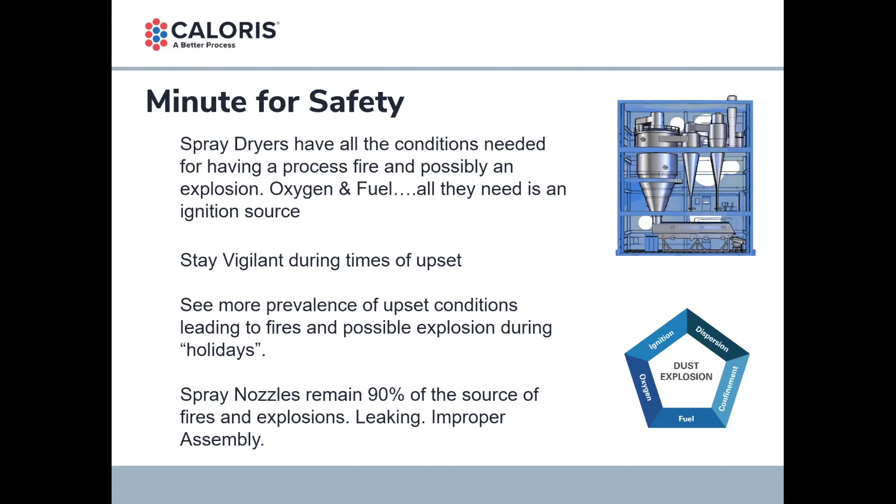Diving into the presentation itself, we're going to look for some low-hanging fruit in your spray dryer - how it could be running better, how you could have tools to troubleshoot it better.

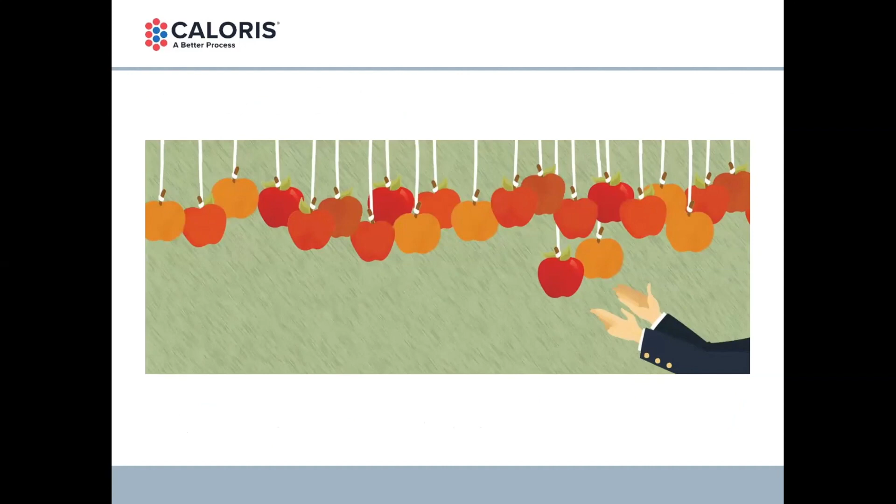I'd like more capacity out of my spray dryer, or a problem with the fluid bed. It comes back to needing some basic knowledge. And again, that comes back to spray dryer heat and mass balance. You might call it a thermodynamic balance.

To be clear about things, mass balance, I mean, that's just the weight of things. That's the weight in pounds per hour or pounds per minute of all the stuff you've got going in and all the stuff you've got coming out. So that's stuff being air, water carried in the air, your product, water carried with the product, and the like.

So we want to understand, to do this troubleshooting, we really want to understand the heat and mass balance. Whatever the problem is, unless it's a mechanical problem, the solution is usually contained in understanding the flows of things, the mass flow of things into and out of your spray dryer.

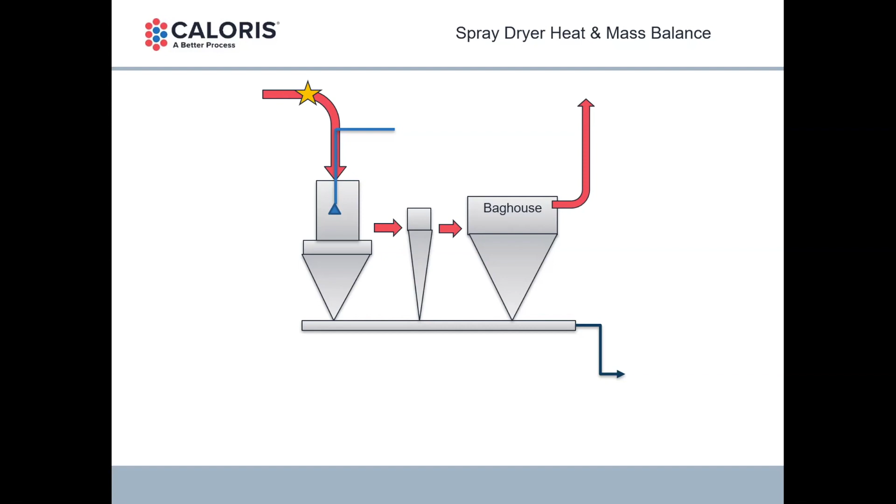So I have a little spray dryer model here. I've picked some product flow rate to come into it. That product is at an amount of solid, so I've picked 50%. So it's half product, half water, and it comes in at a temperature. For our little model of spray dryer here, we're going to get some product out based on the amount we've put in.

In the perfect world that this spray dryer lives in, we're not losing product inside of the dryer. It's not hanging up, it's all coming out. But some of the water stays with it because you've got a moisture. In this case, I've said 5% moisture in the finished product. So we've got a little bit of water coming out with the product bound up in it, and it comes out at a temperature. We've got an airflow coming in.

That air consists of the outside air, so the oxygen and the nitrogen and the argon and whatever else makes up air, plus some water vapor from humidity that comes in with it. Because we're trying to follow the water in this dryer, we need to follow the humidity, the vapor that's in our air portion. And finally, we're going to get the air out.

Now my air out, balanced in this mass balance, comes out at a temperature. It consists of the air that went in, the vapor that went in with the air, the amount of water that got evaporated, all added up to be a new mass, a new weight of air leaving at a particular temperature. Now remember, we're talking about pounds.

When we're talking about air, and that's sometimes strange to people, air is often talked about in CFM, cubic feet per minute. That is a volume flow. And although interesting and able to be converted to a mass flow using the density of the air at a temperature, at an altitude, we do want to evaporate a mass of water in the spray dryer, so we're definitely focused on a mass of air, a weight of air in pounds per hour to evaporate that weight of water in pounds per hour. So I do have a star up here on my diagram.

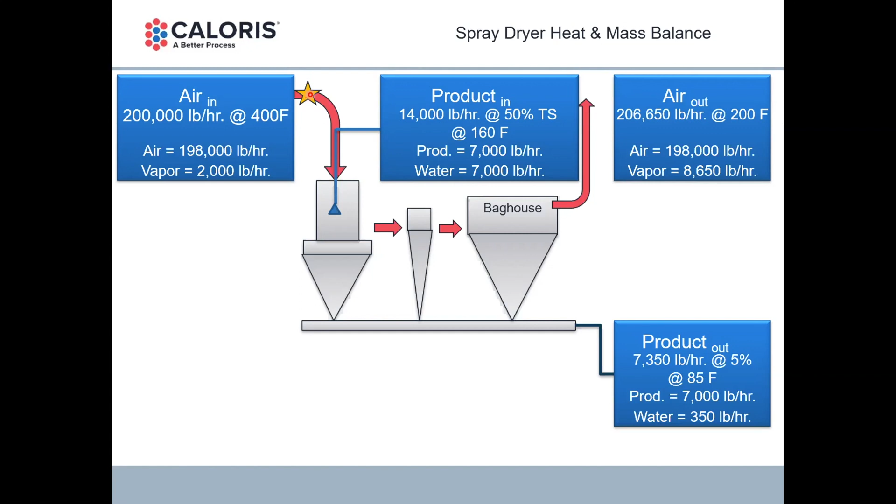There's one caveat, or one could find many caveats, especially if there's additional air streams from fluid beds and the rest. I do want to make note of one thing, and that is how you're heating your dryer, how you're heating this 400-degree air. A lot of cases around the world, and some in the US, we're using indirect heat. So maybe it's steam through a steam coil, or an indirect natural gas heater that doesn't add in any water. But here in the US, we have a lot of direct fired natural gas heaters.

So we might be heating the air up to 400 degrees using direct fired natural gas. And that adds water. Remembering natural gas is methane, so CH4, we're going to burn that in an excess of O2. And the other side of that equation is CO2 plus H2O. In our size here, in about 200,000 pounds of air, and we're going to heat that up to 400 degrees, you may be adding as much as 1,000 pounds per hour of water to your air by burning the natural gas.

And that needs to be accounted for because we're trying to follow all the things that go through this dryer. Just a little note there. We're going to assume that our dryer going forward is indirect heat, so we'll forget that there's water being added through a direct fired gas heater.

So there we are. But what we have defined in this heat and mass balance, or thermodynamic balance, is 16 things. We have 4 blocks, 2 things in each block, and 2 parameters in each of those 2 things, a weight and a temperature. So we know 4 things, what are coming in with the air.

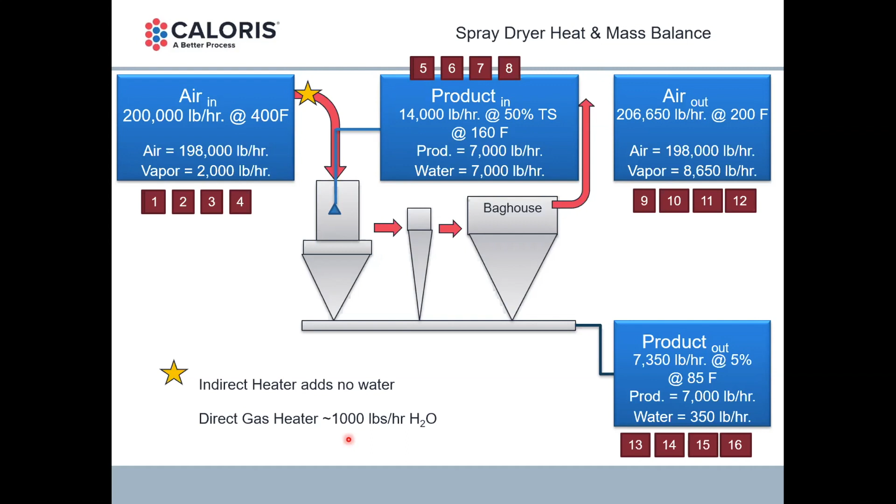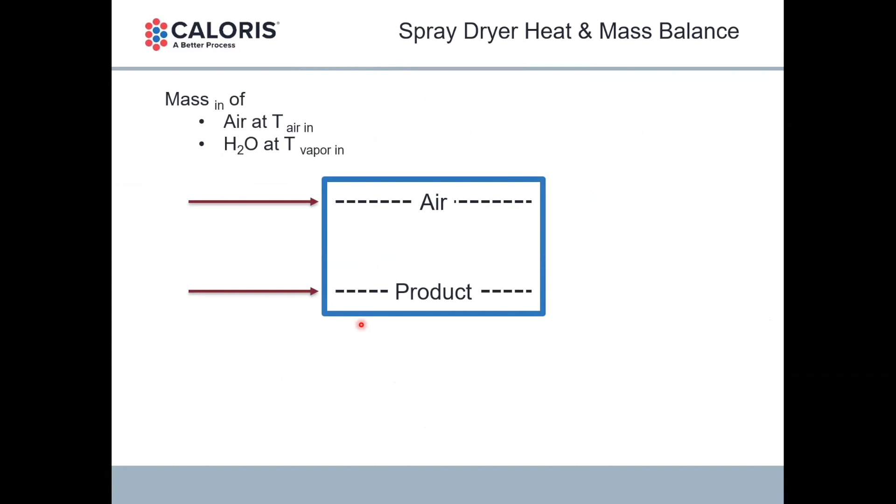We're going to bring the mass in, so the weight in pounds per hour of the air and the vapor at a particular temperature. We're going to do the same with the product. This is the spray nozzles now shown bringing product in with some water mixed in with it at a particular temperature. We're going to transfer some of that mass. Some of the water is going to evaporate out of the product and into the air. So we've got a bit of a mass transfer going on. That's what we need the formulas to help us figure out.

We've got an energy transfer. That's a little harder, that's where the temperatures come in. We've got to figure out how much energy goes from the air to the product. And all of that gives us a mass of air out at a particular new temperature and a mass of the product out at a particular new temperature.

So if you can grasp these same 16 things, we showed 16 things in the last drawing, we get 16 things in this drawing. It's just a different way, a little more schematic way of saying the same thing. But 16 things, if you're missing one, we've either got to measure it or calculate it.

So when you call me or someone like me out to your dryer, again, all that troubleshooting, my problem with the bag house, or I've got a problem with needing more capacity. We're not running as much capacity as we used to a few years ago. If we're trying to troubleshoot those sorts of problems, it comes back to the mass balance, and we've got to know these 16 things somehow.

Or again, if you have a fluid bed, some additional things going on with your dryer, different air streams and the like, we need to know a few more things. But our simple model here, 16 things.

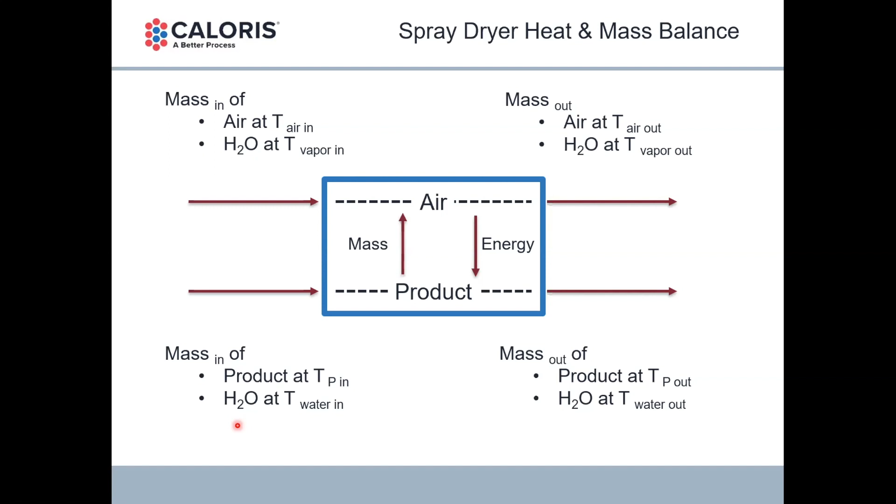So it's kind of concluding the theoretical side of this. We need 16 parameters, and the salient part is we need them accurately. If you want to know accurately how much more you can produce without clogging up your dryer and wetting down the walls, getting the most out of it and into a bag so you can sell it, we've got to know these things accurately. So the 8 temperatures are fairly easy. RTDs, the temperature measurements, the probes on your dryer, if you've got them there, are fairly easy and they're accurate.

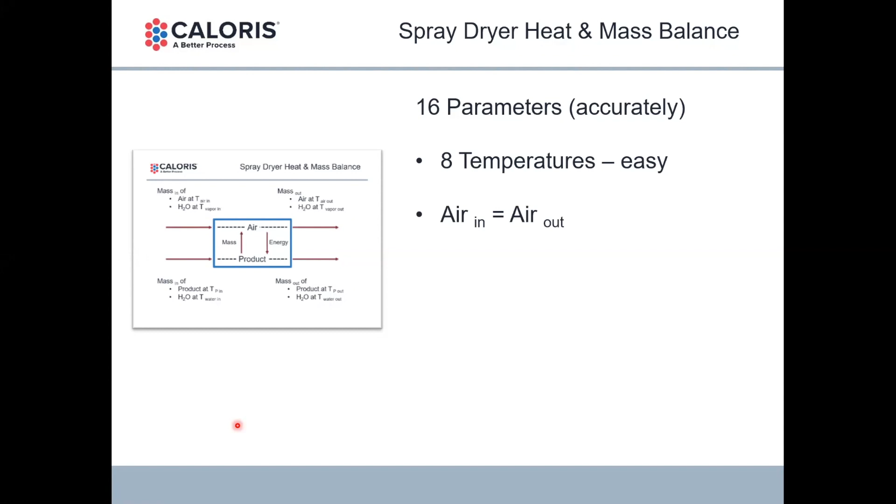So the first half is done. We've got a few simplifying formulas we've already mentioned. The amount of air you put in, the oxygen, nitrogen, argon, whatever air parts you put in, you're going to get out. We assume the dryer is leak-free, not losing a significant amount of air out a hole in it. What goes in comes out.

And we're going to say the same about the solids. If we're spraying in an amount of solids in your liquid feed mixed in with the water, we're going to presume it's all going to come out. If you want to sharpen up your model, you could say you'll lose some to wall buildup, or lose some out of your bag house. But in our simple model, we're going to say whatever we put in is going to come out again.

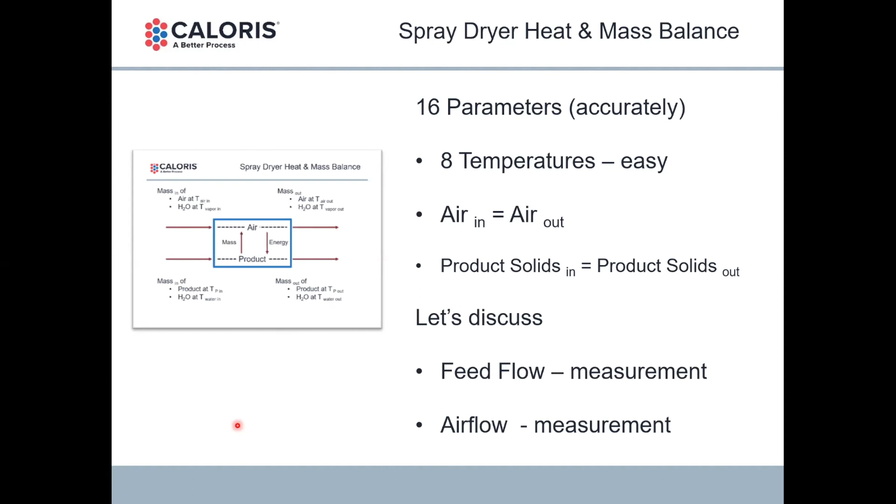But now we've got the harder ones left to figure out, and that's what we're going to spend the rest of the time discussing. We want to talk about the feed flow - what you're spraying in as liquid, how to measure that accurately, and about the airflow, how to approximate it and measure it accurately. That's going to be the second half of what we've got going on here today.

So a little bit of how to apply this to troubleshooting, a little bit about improvements you can make, and a few simple tricks that people have taught me over the years that I want to pass on to you.

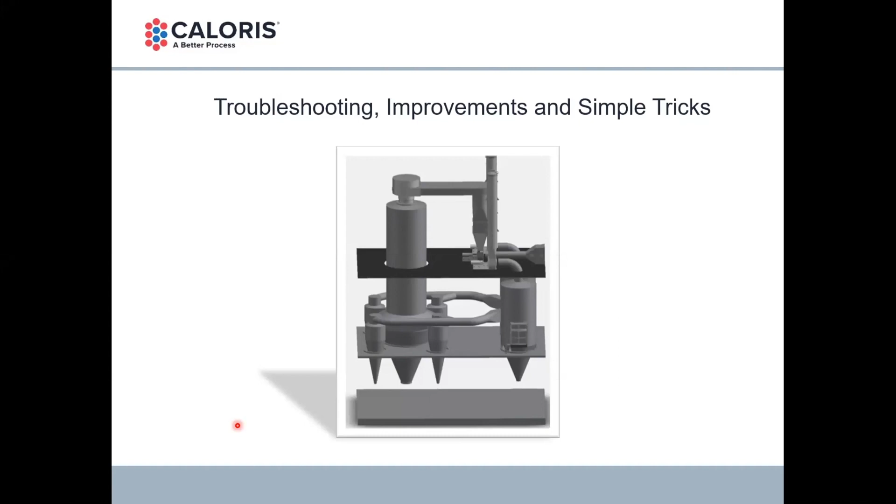So the first part, we're going to talk about feed solids going in - that's our product going in. Are you running consistently? Are you feeding consistently? Are you making your feed consistently? And if you make it consistently, can you measure what you're making accurately? So that's the first part of the discussion.

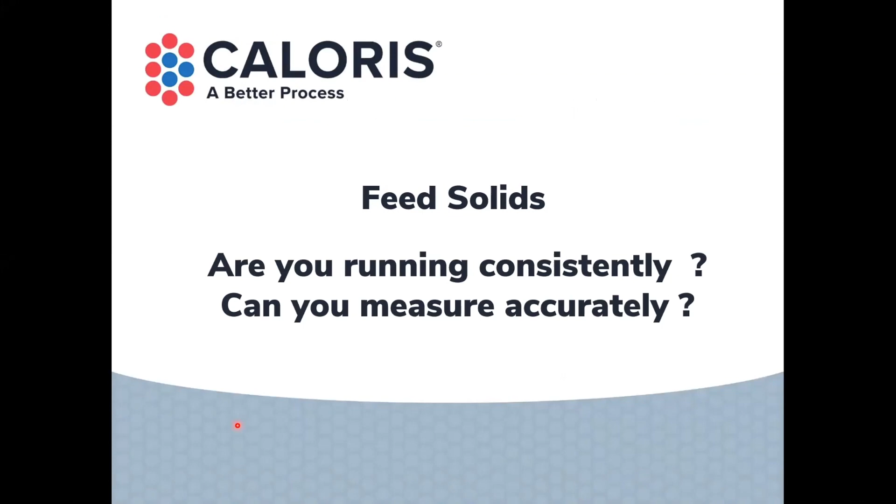Now, I'll come into a plant sometimes and I'll ask the operators, so what do you think you're spray drying? What do we go into the control room - what are you drying today? And the operator will tell me about what they get from upstream in the plant. They'll say something like, I usually get 26 to 28% total solids of my feed in the feed tank. So 26 to 28% of the mass of things you're trying to capture, and the rest of it being the water or whatever you're trying to evaporate.

Well, how often do you measure it? Well, we measure it once an hour, record it, put it on our log sheet. Now maybe you have a more modern HMI system and a data logging system, way better. But still often the operators only know what's going on right now or what went on an hour ago. But how does this impact things? How accurate is this, and how does it impact what's going on?

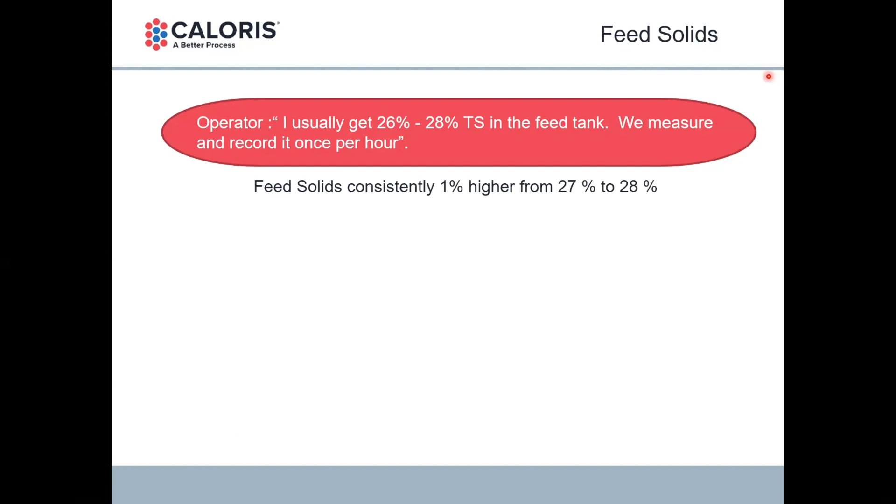To troubleshoot it, you've got to know accurately what's going on. So I want to talk for a minute about what consistent feed solids really means. What would 1% higher actually mean? Not yet measuring more accurately - let's say you're measuring accurately, your instruments are calibrated, you've got instruments with good resolution, but you actually want to get 1% more. Instead of them feeding you 27% from upstream, they're going to feed you 28% from upstream.

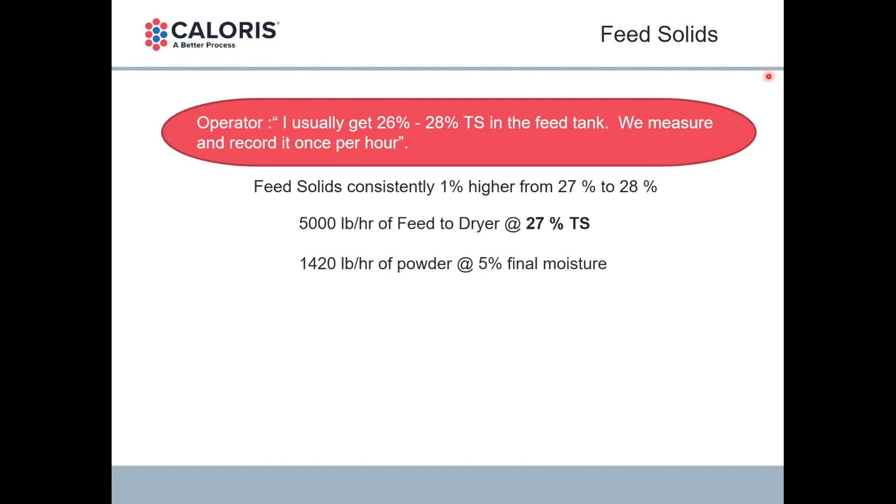What does that mean? So I'm following an example now of a 5,000 pound per hour dryer. So 5,000 pounds per hour feed, liquid feed, coming to the dryer, 27% solids. That's going to give you 1,420 pounds per hour of powder coming out, still with 5% final moisture. So a little bit of that is water bound up in the powder, and that gives you 3,580 pounds per hour of water evaporation.

But now we want to get the guys upstream to feed us 1% higher solids. What does that mean? I'm going to use the same amount of water evaporation - we're not changing temperatures, we're not changing airflows within the spray dryer, we're just going to thicken up the feed solids just a tiny little bit. And now we're going to feed in 5,080 pounds per hour of feed to the dryer, 28% solids, and we're going to get 1,495 pounds per hour of powder out. So, okay, 75 pounds per hour more out.

But that's really a 5.2% increase in your production rate, from 1% more in the solids. This is what I'd like you to leave with, understanding this: 1% more in the solids is going to give you a 5% increase in your powder output. What would you do for that? What does that mean to your operation? Are you measuring accurately enough to do this? Are you operating consistently enough so that you could take advantage of this?

And what would you do to get yourself consistent enough or measure it accurately enough? Well, that's 75 pounds an hour. I'm going to take a low number and say 5,000 hours a year. If you're running more than that, it would be natural for a plant, especially a dairy plant or commodities plant, to be running 7,000 hours a year, but I'm going to say 5.

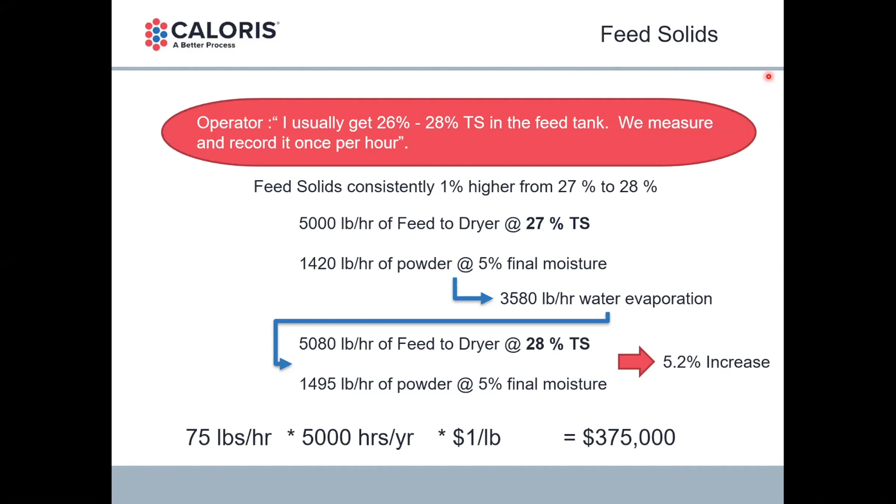So feed solids, we'll move on to feed rate. A couple of tricks here about feed rate, because we not only need to know what we're putting in, we need to know how we're putting it in, how fast we're putting it in, the pounds per hour that we're putting it in at. And if you have a feed flow meter, that's great.

And if you keep it calibrated, that's fantastic. But calibration is a challenge. Keeping it calibrated is a challenge. And a micro motion type Coriolis meter is an expensive item, and not all plants have them. So what else could you do?

Or if you need to make a comparative measurement, you, the engineer, need to go in and find another way to see, is the flow meter really accurate? Well, your nozzles, your spray nozzles are an orifice flow meter, and I want to show you how to use that. Your positive displacement pump.

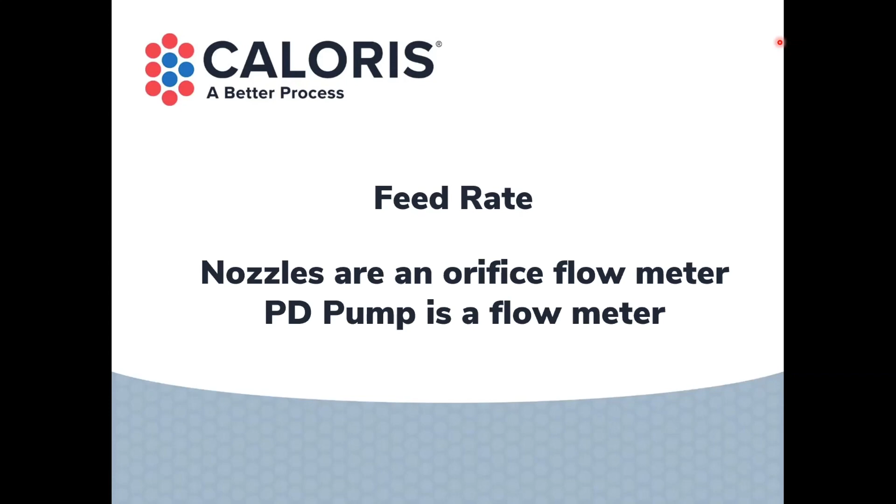So if you're using a high pressure pump, that's a positive displacement pump. And so if you're using that, that's a flow meter as well. So let's take a look at those two. So high pressure pump is a flow meter.

We know your high pressure pump will have a number of plungers in it. It might be 3 plungers, 5 plungers, whatever. That's a cylinder, and we can know its size. So it has a plunger diameter and a stroke length, so you can calculate each of the 5 piston sizes, the piston displacement.

If you don't know it and you have your operation and maintenance manual, it can probably tell you there, or you can go back and call your manufacturer and find out what that piston displacement is. If you know the maximum speed, which will also be in your operation and maintenance manual, you'll know what your total maximum is. This particular example, 120 RPM maximum.

So if we calculated out what this pump displaces and what it is as a flow meter, we would first recognize, okay, it's a liquid, so it's an incompressible fluid. We have a cylinder volume. In this case, that above calculates out to 497,000 cubic millimeters, so I'm going to say half a liter with every cylinder stroke.

We've got 5 cylinders running at 120 RPMs. So that gives me 300 liters per minute.

And the loose number that's in there, the approximation, because everything else is pretty tight so far, the approximation is the transmission efficiency. So I'm going to say this thing runs on a belt drive. The belts have a little bit of slippage. There might be a tiny little bit in the transmission itself. And I've found historically when I do this, 97% transmission efficiency is pretty good.

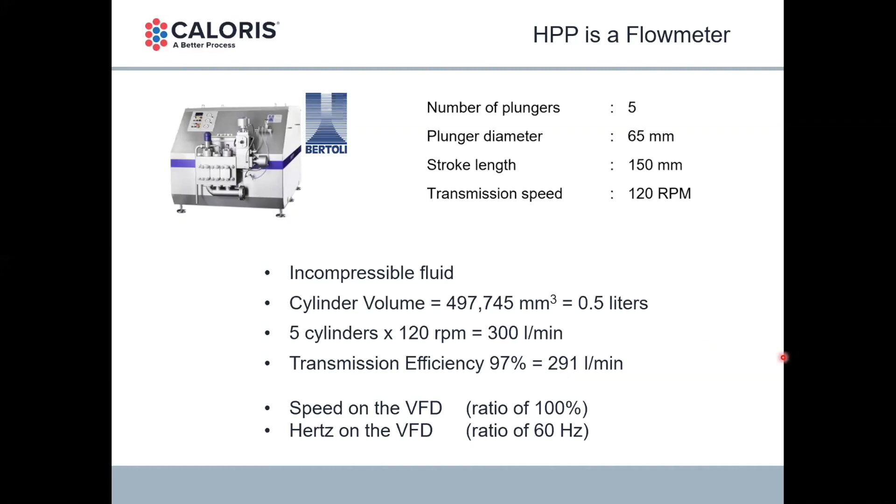So your nozzles are also an orifice meter. There's lots of brands of nozzles out there. Delavan is very popular, Spraying Systems is very popular. They're both reputable manufacturers, no issue there.

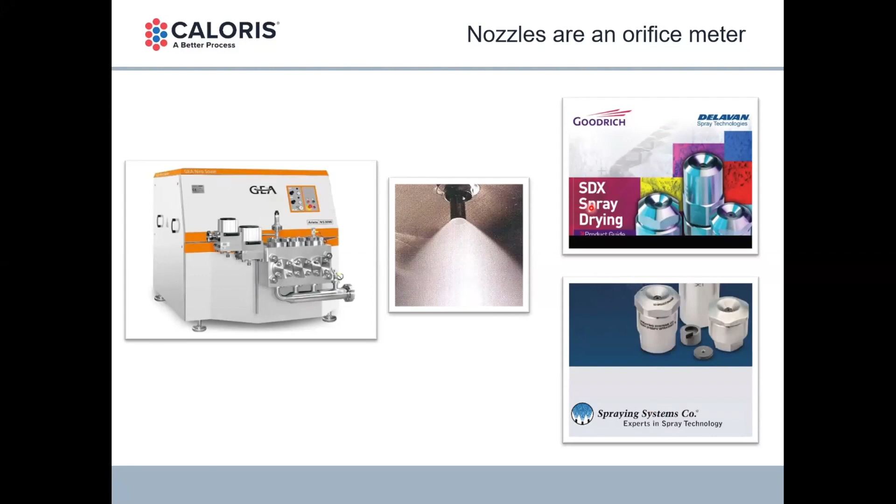So do make sure, as you follow this exercise, I challenge you to do it yourselves for your plant. Do download your data sheets from your manufacturer. I'm going to follow this exercise through as if it was Delavan nozzles. Delavan has a PDF you can download.

You'll need to know the type of nozzles. I followed this exercise through for their SDX nozzles. I'm going to say that this dryer we're talking about theoretically is using SDX V nozzles, so I'm in the column for SDX V. You may have different ones.

A nozzle consists of two parts, the swirl chamber and the orifice. So you've got to see what swirl chamber you have. I'm going to say I have SFV swirl chambers, and my theoretical dryer has 109 orifices, so that's 0.109 inches in diameter.

Every day your plant puts together their nozzles, presuming you have nozzles and not a rotary atomizer. Every day your team puts them together, and you're buying more replacement parts. You should really know what your nozzles are. It's probably hung up on a piece of paper or in a book in the control room.

But knowing what those are allows you to use the catalog from the manufacturer and find out the flow rates, because they're all calibrated. So if I follow the 109 across the chart, I'll pass by the liters per hour, and go to the gallons per hour size. Now we want to know the pressure, and that's going to be on the high pressure pump or a readout from it. I like to use the gauges on the high pressure pump itself to get the number.

If the number is somewhere in between two values, you can ratio it linearly and get an average, finding where in between two values you should be lying. Here, for this simplified example, I'm going to say we're running at 3,000 PSI, and that means each nozzle would be 343 gallons per hour.

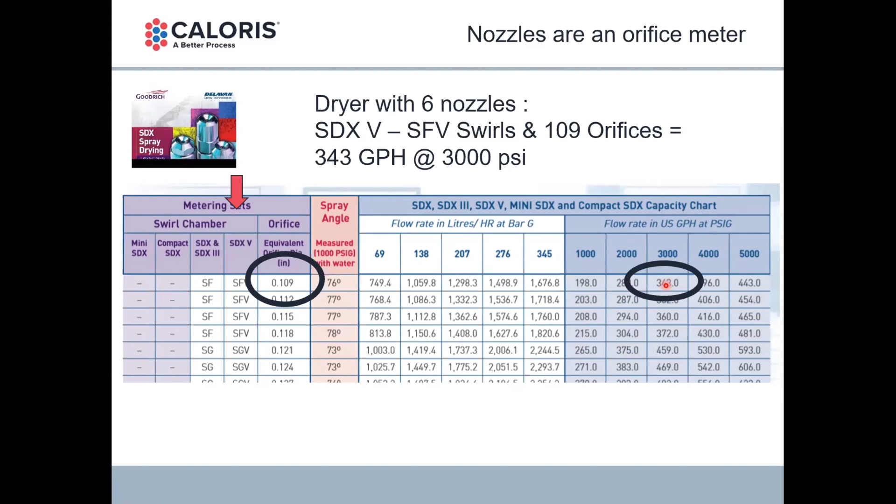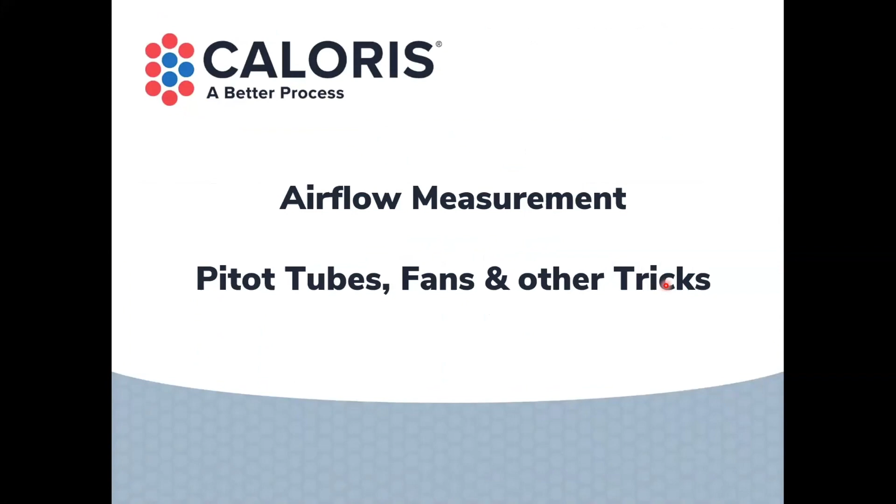So that takes us through the feed side, feed flow and feed solids. I want to go into the airflow side. We said we'd talk about airflow, needing to know airflow as part of your troubleshooting. So we're going to talk a little bit about pitot tubes, talk a little bit about fans, and a couple of other tricks to approximate, to get that wet finger feel for what your dryer is potentially doing.

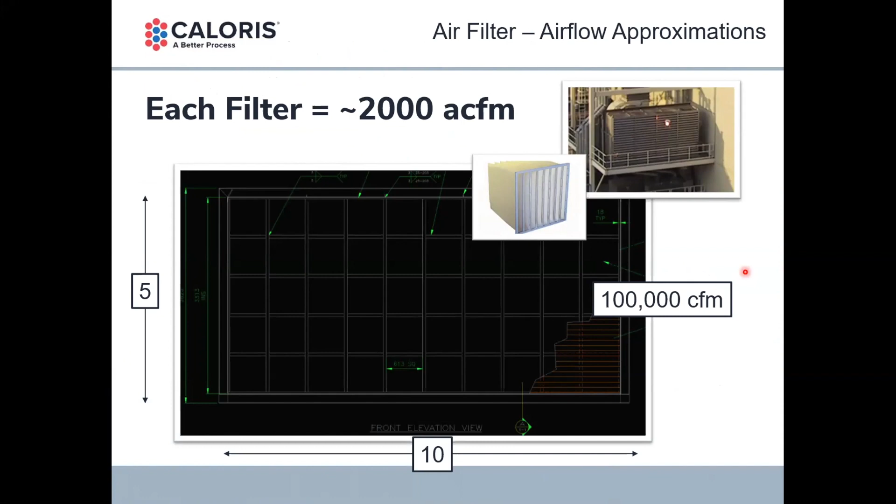All right, air filters. This is an approximation, a wet finger sort of thing. You walk into a plant, you're just trying to get a common sense approximation. You calculated how much air was, or somebody told you how much the airflow was. Are they even close? Is this the right number?

One of the rules of thumb is for proper design of an air filtration system, each filter cell, and the filter cells are generally 24 inches by 24 inches, or in metric, 600 millimeters by 600 millimeters. Each air filter is generally designed for about 2,000 ACFM. So that's the rule of thumb. I've thrown a drawing of a filter box up here, and this filter box is 5 filter cells tall by 10 filter cells wide.

So when I look at this dryer, when you call me out to your spray dryer and say, Jim, help me with my dryer, I'm going to go look at the various filter boxes you have around there, and I'm going to say, all right, this is about a 100,000 CFM dryer. Now, again, we're in volumetric flow, CFM. I need to find the altitude of your plant, the temperature of the air, and then I'll get a volume, a mass flow, and convert that into pounds per minute and pounds per hour. But it gives me a very wet finger approximation.

Now, that's if the dryer designer designed this well, if it's still running the way it was designed, and there's always a little bit extra. They probably didn't need 50 filters, they might have only needed 47, but 50 makes a nice square, 5 by 10, so it probably has a little bit more in it. But still, it gives you that basic fundamental approximation to know how much air is moving through this system.

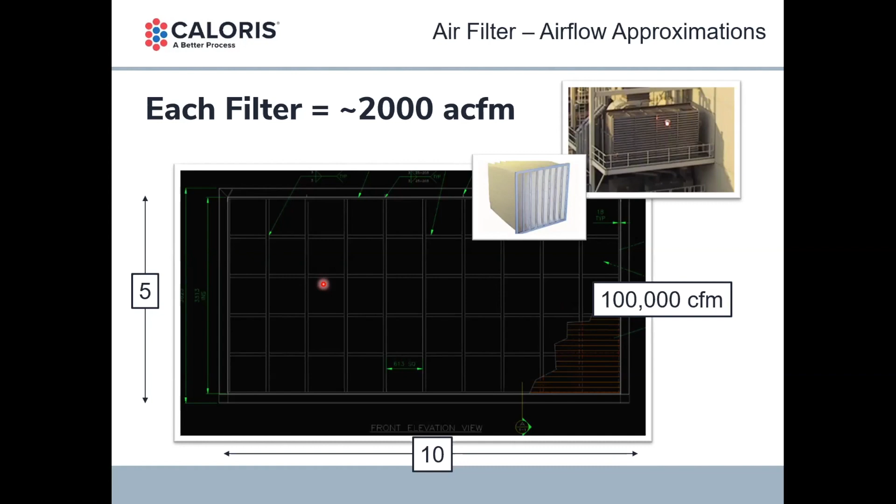So airflow approximation, step one. We want to get a little closer, we want to measure it more accurately, so we're going to do it by pitot tube. Just because we're maybe a little bit more used to seeing pitot tubes in our life than we realize, pitot tubes are a device used to measure airflow. For your next pub quiz, you can have this fact.

Henri Pitot invented this in 1732, and he was using it to measure water flows on the Seine River. It's subsequently been realized it can be used to measure airflows, and it's on the outside, multiple places on the outside of every airplane, measuring external flow. We can use a device like shown here on the left to measure internal flow inside of a duct. We're going to measure the total pressure on one leg of this, the static pressure on the other leg of it, and we're going to use those two to get a dynamic pressure differential, or commonly the pitot pressure.

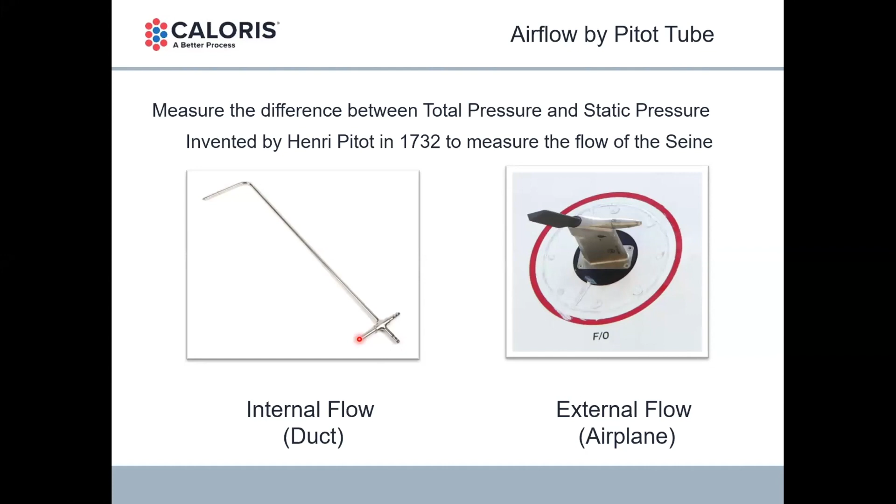You're only going to get a highly accurate measurement if you have fully developed airflow, so it's not faster on one side and slower on the other. Well, we never live in a perfect world. Our dryer ducts are never as long as we'd like them to be.

So we've got to do some work, we've got to do pitot traverses. If you have a round duct, you want to go across the duct, up and down the duct, get some averages across these, do concentric areas, again, equal concentric areas. The inner area is the same as the area of the outer annulus, and you've got to plan these measurements so you can get an average, an accurate average.

You're going to measure a differential pressure, and you'll know your air density for your altitude and temperature. You'll divide that, or use the gravity constant, and get a velocity through a square root factor, so you can get the velocity in the duct. From that, you know the cross-sectional area of the duct, and therefore you get a flow through that duct. A bit of a complicated procedure, but still the best way to get an accurate airflow measurement through the duct. A small amount of equipment, a little bit of work and knowledge, and you're going to get a good reading.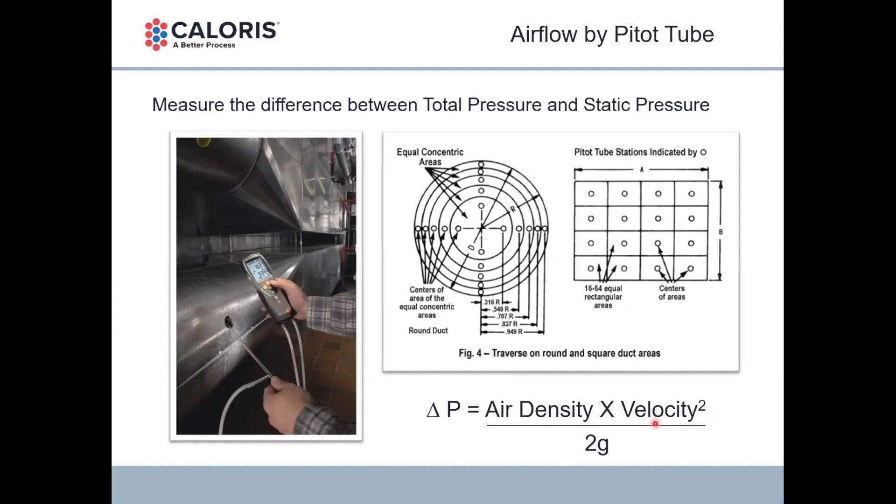So a couple of caveats about pitot tube measurements. If you have too low a velocity in the duct, say 20 or 30 feet per minute, you're not going to get enough of a differential pressure. It's going to be too low and imprecise. Spray dryers are usually above that, so it's not much of a worry, but be aware. If you have too high a velocity, it might not quite be turbulent, but it might be starting to enter a turbulent regime, shedding some vortices, so you get turbulence in one part of the duct or another. High velocities aren't going to be that valid either. Again, spray dryers don't really run into that, but I feel it's worth saying.

Third caveat for perfect measurements: you want about 8 straight duct lengths upstream of your measurement point and about 2 straight duct lengths downstream. That's why in a spray dryer it's going to be an approximation. You want to use that 8:2 ratio, or wherever you take the measurement, go as far downstream as possible and get the measurement there before you enter an elbow or an expansion in the duct or something like that. So those are some limitations around using pitot tubes.

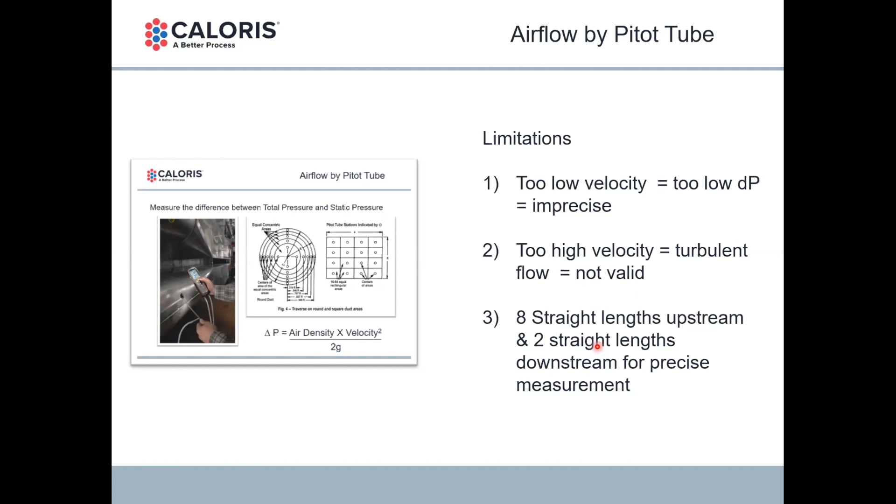Your cyclone, if you have one on your spray dryer, is also a flowmeter. This is the formula by which you can calculate the airflow through your cyclone. I've used metric units here, so airflow is in kilos an hour. There's a constant in it that makes it a bit hard - it has to do with the exact geometry, and that could come from your manufacturer. Or if you're comparing the same cyclone, how it runs today versus how it ran a year ago or 10 years ago, if you have data, you can equate both sides of the equation and cancel out the K factor.

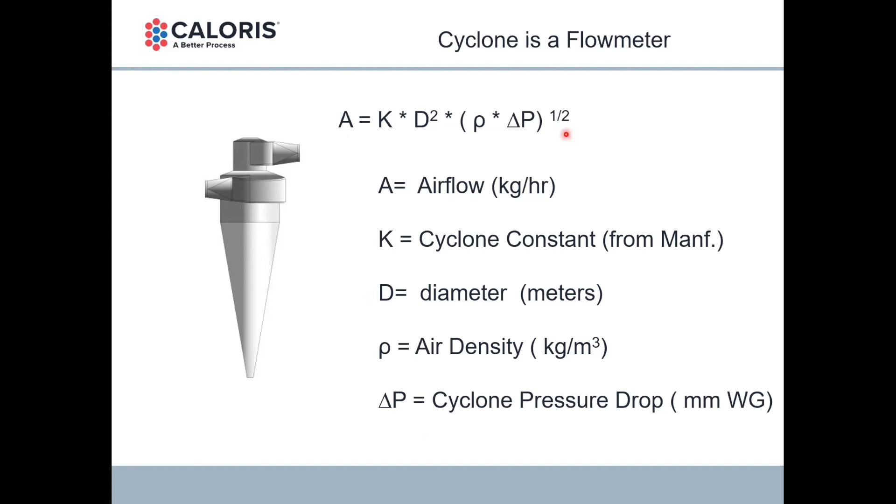The diameter, in meters in this case, the air density, and your pressure drop on the cyclone - pressure drop here is in millimeters of water gauge when using these other factors in the formula. If you're doing it in imperial units, just check a textbook and make sure you're using the right units to get the right outcome. Again, by the formula, if you know the original design airflow - so you have a new dryer and you're still in contact with the manufacturer - you can find out your K value for that cyclone, or you know your dryer is running at design, designed for 40,000 pounds per hour, 20,000 kilos per hour, whatever your number is. You can calculate your K and keep that up your sleeve for future measurements.

A bit of a trick from experience: most high efficiency dryer cyclones are designed for about 150 millimeters of water gauge, or 6 inches of water gauge. Higher than that, you're not gaining much more separation efficiency - you're actually getting too much smearing of product, or not gaining anything for the extra energy you're putting in. So a lot of dryer cyclones, I'd say the predominance of them out there, are going to be in that 150 millimeter range for their design. You could use that to calculate a K factor, comparing it against how your cyclone is running currently.

Now we're into that troubleshooting situation. How much airflow do I have? Why is my dryer running the way it is? Well, today, for example, you're only getting 3.5 inches of water gauge pressure drop when you measure between the inlet and outlet of the cyclone. Well, going from 6 inches to 3.5 inches, that's about 41% lower on the differential pressure, and that gives you about 23% lower on the airflow when you equate that through the formula.

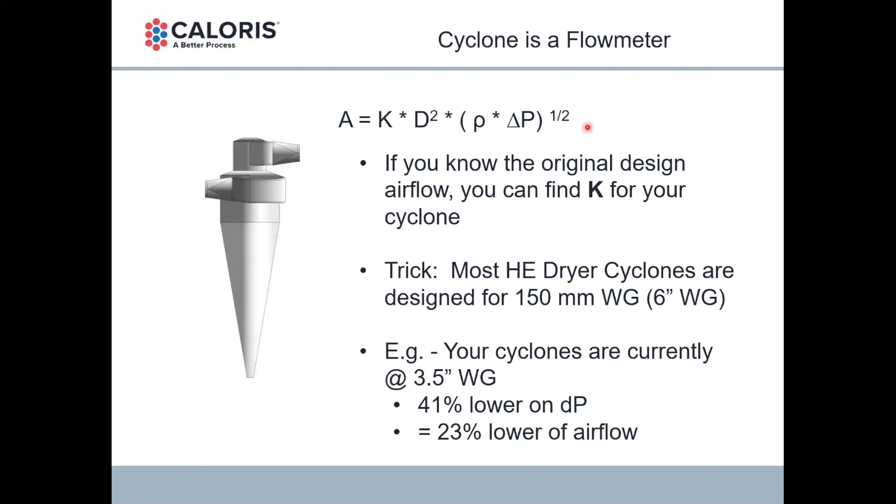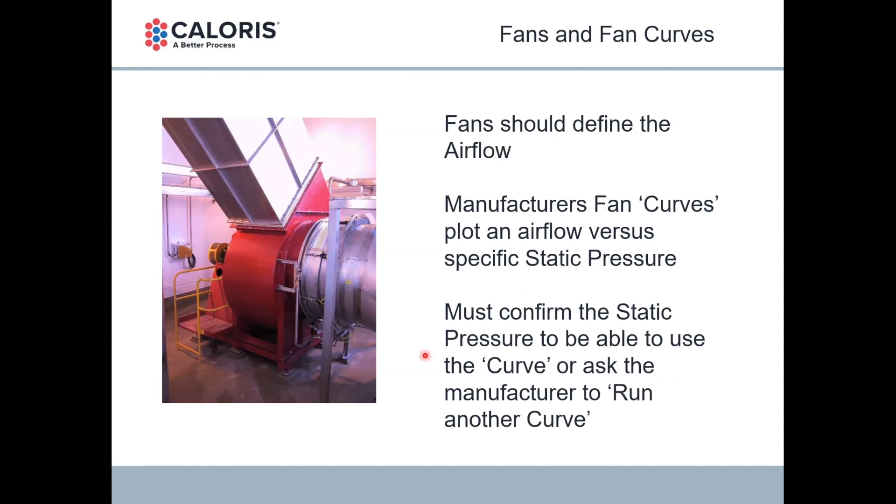So moving on to fans. Fans really define your airflow. They get made, built, and originally delivered from a manufacturer who designs them to move a certain amount of air at a certain static pressure. And they can provide you with design information. If you have that initially, hold on to it - it's like gold. If you don't have it, they should be able to reproduce it for you, and you should be able to get it.

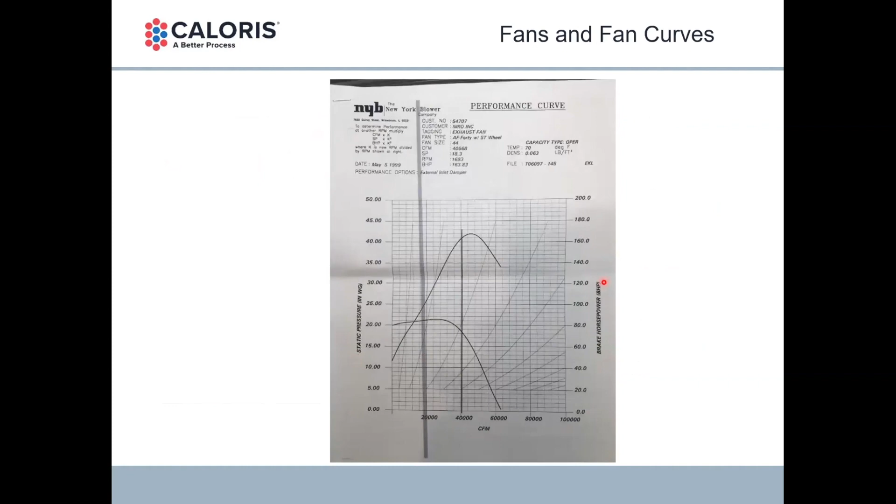We're talking about a document that looks like this, a fan curve that shows a ratio of static pressure and air flow, and also the brake horsepower that gets used. In the top of the document, it's going to show you the air flow - you can change that over to pounds by using the air density, but it's only valid at a certain static pressure. So you have to check: are you still running this dryer at the same static pressure that the supply fan was designed for? Is there as much resistance as was originally designed? Did I add something into my airflow stream that adds resistance, and maybe that's choking the airflow? Did I remove something that's lowering the static pressure and allowing more airflow?

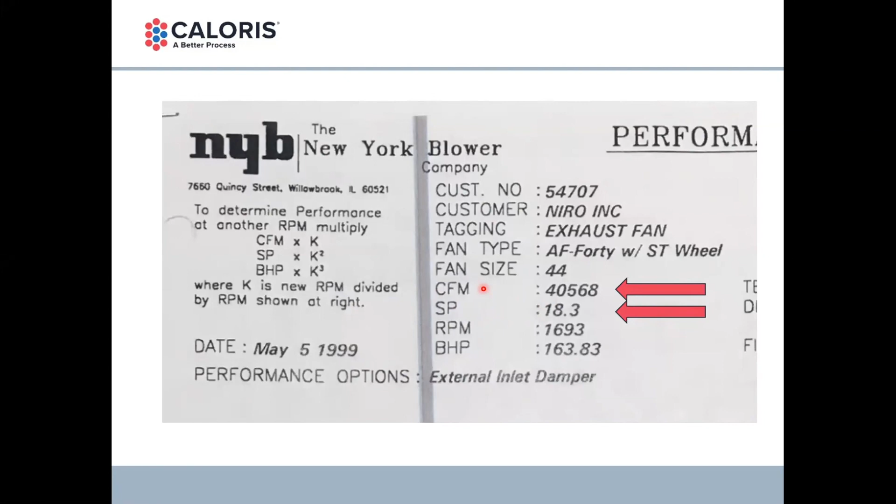So as we move into the last couple of slides talking about differential pressure, you can do the same exercise with your exhaust fan. I've chosen to show an exercise with the supply fan. In the front of your supply fan, you've got some filters, but you're taking air from outside, most likely - maybe from in the building, but most likely from outside. And generally your air pressure there is 0 inches of water gauge as an absolute measurement at the air intake.

The other thing we know as we move from fan to heater, up the hot air duct, air disperser, and drying chamber, is that in the drying chamber you're going to have some value - you're going to know what that is. In my example here, I'm using minus half an inch of water gauge as my chamber pressure.

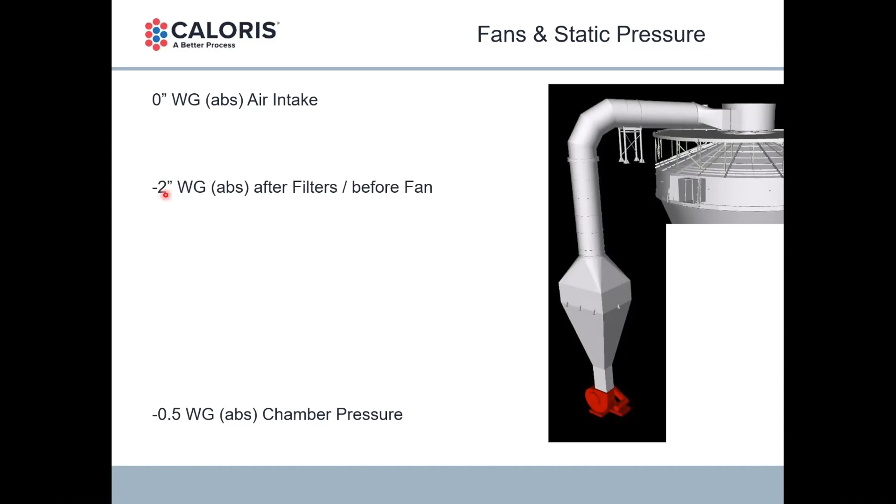So what's going on in between the two, and what work is the fan doing? After the filters, right before the fan, I'm going to measure a new absolute pressure - one leg of my gauge is connected and the other one is reading the room pressure to get an absolute pressure. And I'm reading minus 2 inches, so that's telling me there's about a 2-inch pressure drop across the filters. It's just information to know as you do this buildup and troubleshooting.

This is where your variability comes in. If you have clean filters, I've chosen 2 inches for this example - you might be at 0.1 inches with clean filters, or 0.5 inches if you have HEPA filters. You could have very dirty filters - when was the last time they were changed? That might lead you to 5 inches of pressure drop across the filters. All of that is variable, and that's why we want to measure it, because we want to know how we're running at the time we're making the troubleshooting analysis. But in my example, we've used 2.

So now I'm going to work backwards from the other end. I'm going to measure up here at the inlet to the air disperser, taking another absolute pressure measurement at that point, and that tells me I've got 6.5 inches of differential pressure across the air disperser. I work backwards from there.

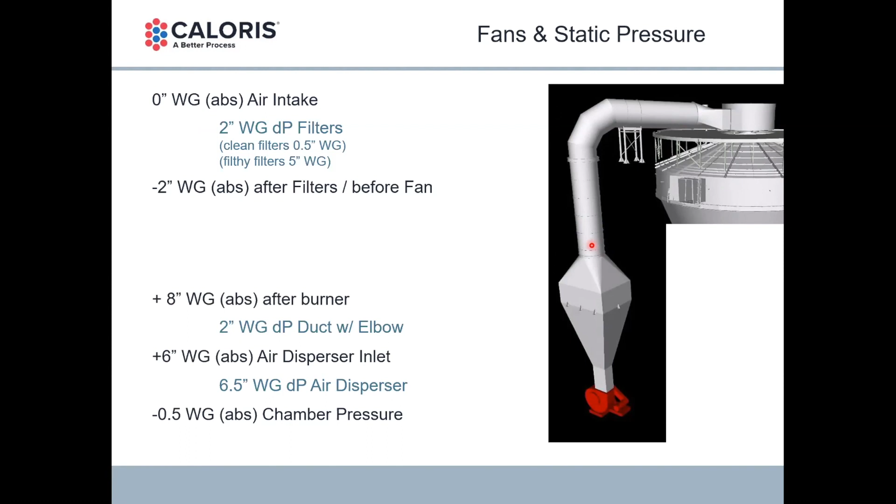I'm going to take a measurement after the heater, after the burner, and I might have 8 inches of pressure there in my example, absolute pressure. That tells me I have 2 inches of pressure drop down the duct, around the elbow, to my next measurement point. I come backwards and measure before my heater, and I now have plus 12 inches of pressure, which means a 4-inch differential - 12 minus 8 is 4 - across my heater, burner, or coil.

And that tells me something about the fan. In this measured example, I just went out to the field and measured this - this fan is running at 14 inches of static pressure. Now you can go compare that to your fan curve and say, oh, this fan was designed for 18, but it's only running at 14. That means the curve isn't really quite valid.

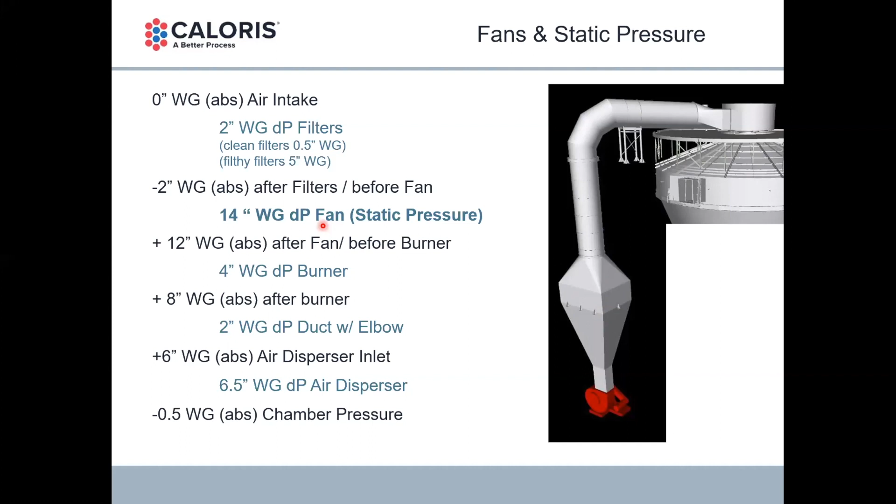You don't go to a different place on the curve. That curve is valid for that airflow and that static pressure. If you have a different running condition, you need a different curve.

Your fan manufacturer can produce that curve for you, or you can use their online tools. I chose to look at New York Blower. I have no preference for them, but other fan manufacturers have the same types of tools. New York Blower calls it fan to size. You can put in some data, your model number if you have it, or your wheel type, or your serial number. You can call them up and talk to them and find out what's going on. This is even available as the New York Blower iPhone app that does the same thing.

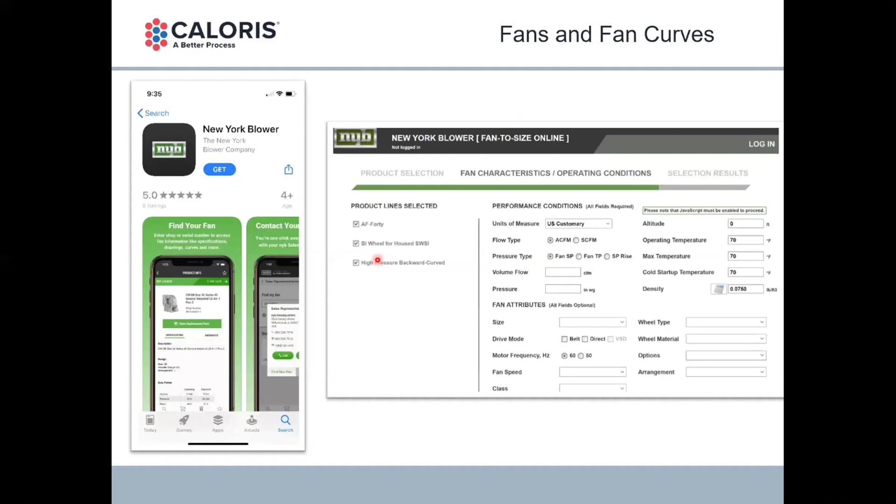So I really want to challenge you. If you have the time and the inclination, with a little bit of work you can know your dryer really well, so you can know those 16 things we talked about at the beginning to troubleshoot your dryer. With that, I'm going to wrap up and give you a little homework.

We showed the 2 books at the beginning. Go out and download those copies, get those PDFs. I'm not saying read them cover to cover, but become familiar with the content, so when you need help troubleshooting, you know where to look and how they can help you.

I challenge you to know your dryer feed solids, how you can measure those solids, confirm the density of your product with the lab, and estimate the accuracy of your instruments. Know your dryer feed rate, do the 2 exercises. Get the data on your high pressure pump and its piston displacement and calculate the feed rate that way. See how it compares to the nozzle chart and your estimate of feed rate from that, and how it compares to your flowmeter.

Use one or more of the methods to estimate your airflow. Get the manufacturer's fan data and keep it. If you're inviting someone like me out to your plant, we're going to need this data anyway, and we'll get to the bottom of your difficulties sooner if we have it at hand. So go out, work with the manufacturers, collect the data, and keep it in a place in your plant.

And if you'd like a little extra credit, if you're that person who finds this easy and wants to do more, recognize that especially on your supply fans, you're going to have differing conditions between summer and winter air. Go out and ask for your fan curves under both sets of conditions, and take a look at how that affects the amount of air you're moving through your plant and what that might do for you.